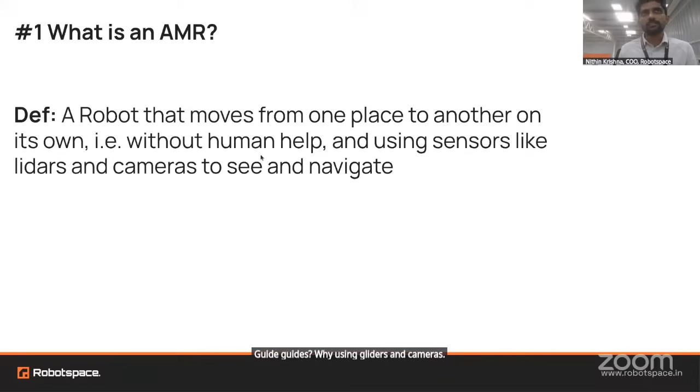So by definition, it is an autonomous mobile robot, which means that it's a robot that goes from one location to another, and it does not require any human help, meaning it does not require anyone to push it or guide it. It has its own guides by using lidars and cameras, and also it has its own motors so that it can move on its own, right?

Your voice is echoing. Sir? So can you hear me? Yeah, please go ahead. Mr. Nithin. Okay.

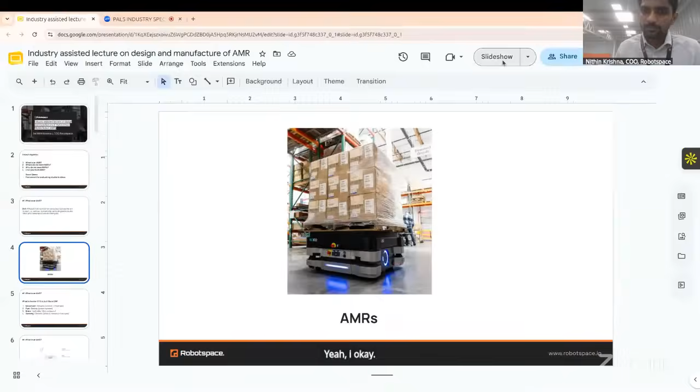Okay. So this is a typical AMR, right? And we'll understand what is inside it. It is just like another car. When I say car, we need movement, fuel, brain and sensing. When we say movement, it's basically the wheels. Wheels have motors and drivetrain. How do we make them move? We make it move using motors and wheels, right?

Then fuel, most of the time it is battery, because that's the easiest way to handle robots, right? And then there is brain, which is the controller. It's basically a computer that is sitting on it and taking all the decisions. And for sensing, what do we have to sense? We need to see the obstacles. We need to see the path. Those are all covered under sensors, which are basically lidars and cameras. Right?

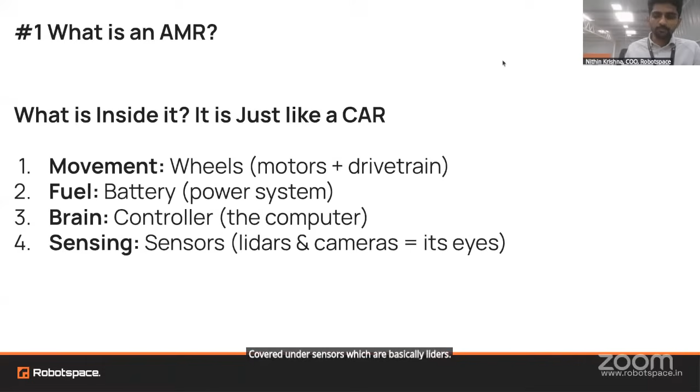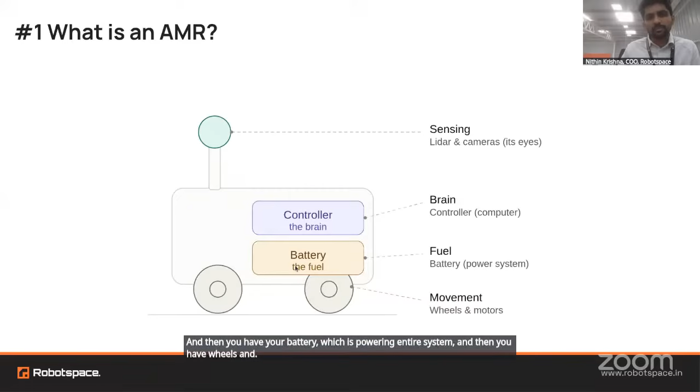So a simple block diagram of how it looks, right? We have sensors sitting on the top and various sides of the robot to detect any obstacle and also find the path, right? Then comes your controller, which is the brain, the computer, and then you have your battery, which is powering the entire system, and then you have wheels and motors. So this is the typical AMR in a block diagram.

Okay, and now, where do we need them? We know that warehouses need them. We saw just a picture, right? We need them in factories to move material from one location to another, or hospitals for serving medicine or food. And then airports, you might have seen robot vacuum cleaners that are cleaning inside the airports.

And for hotels also, in China, you might have seen some videos. If you ask for a water bottle, the robot brings it to your room instead of a person. So that is hotels and restaurants. We have already seen robo cafes which are serving food in India and also abroad, right? So there are multiple places where AMRs are used.

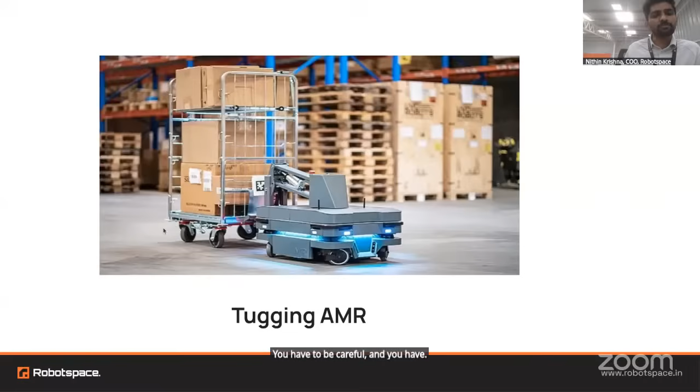It's just like we are driving a car and we have a trailer behind it. How do you turn it? You can't just turn like you do not have a trailer, right? So you have to be careful, you have to give additional safety systems, and also the radius has to be increased.

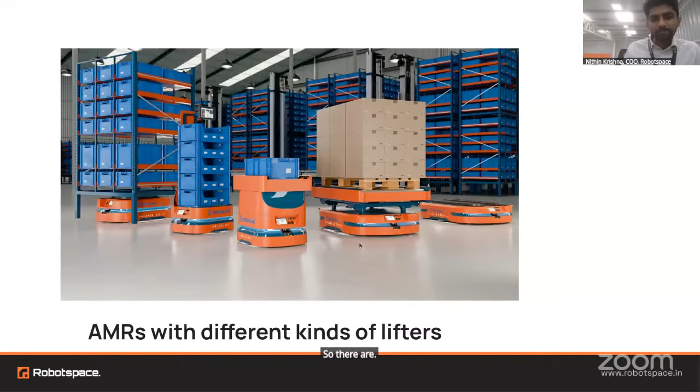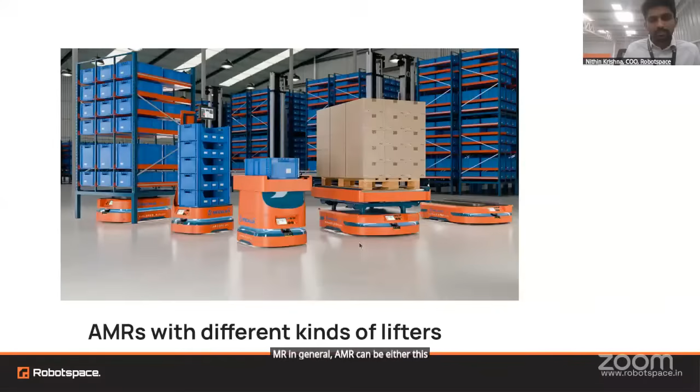I just wanted to show you all of these so that when I'm talking about AMR in general, an AMR can be a tugging one, or it can be a material delivery one, something like this. This is a forklift AMR. You might have seen forklifts, but this has the capability of an autonomous mobile robot, right? Meaning there is a lidar on top of it that ensures it goes without crashing into anything.

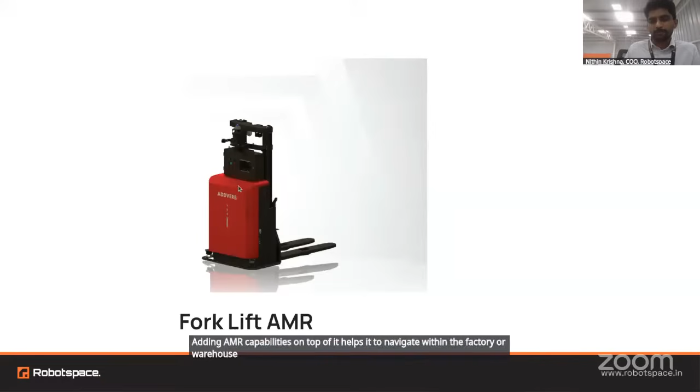And why do we need a forklift actually? Because usually pallets look like this one. To pick this up, the easiest way is a forklift. A forklift has the capability to pick any pallet, and adding AMR capabilities on top of it helps it navigate within the factory or warehouse easily.

So this is a delivery robot, right? This is also an AMR. It is an outdoor AMR, right? It is outdoor delivery. It delivers food. There are multiple use cases for outdoor AMRs. This is one of the robots that we have built actually.

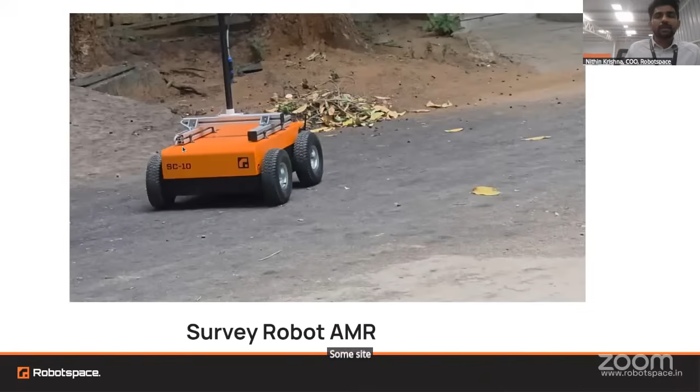This is doing a survey. So this is also an outdoor AMR. It is doing a survey of some site, and then capturing all the data, and it will give a report.

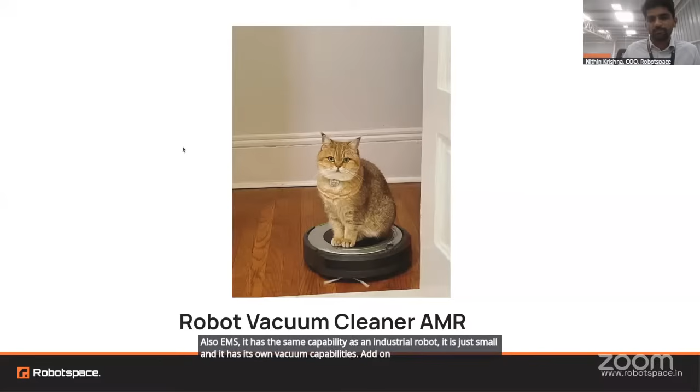So this is another robot, and you might have seen this kind of robot already in your houses, right? So robot vacuum cleaners, which are also AMRs. It has the same capability as an industrial robot. It is just small, and it has its own vacuum capabilities added on top of it, right? So this is a typical household AMR.

And these are the service robots that I was mentioning in the restaurants. So people in the kitchen load the material and click a button, and it will go to the table and stop. So all these AMRs fundamentally have autonomous navigation, meaning it can go from one location to another on its own. It does not require any human intervention to go from one location to another, right?

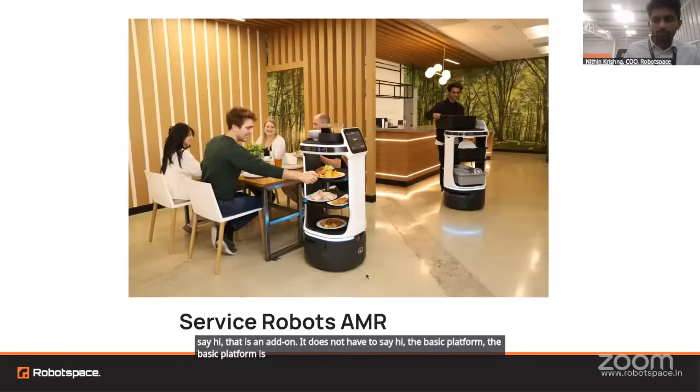All other things like picking the material is an add-on. Picking the material, placing the material is an add-on. If this robot has to say hi, that is an add-on. It does not have to say hi. The basic platform is the same for all of them, only the application changes. And this is medicines and all. Hospitals also use this kind of robot, right?

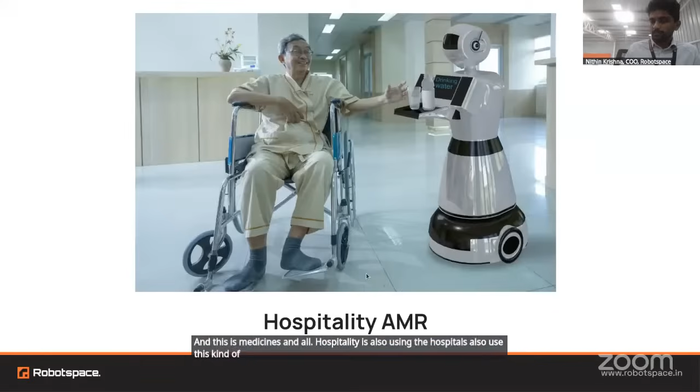And a little technical on this one here. So Scoot is made by Robotspace, and like any other robot, this also has the same AMR capabilities, but what we have built is a platform. So we did not specify you should only use it for manufacturing, you should only use it for warehouses. This can be used anywhere depending on the requirement.

So when we make this one robust, any application on top of it is just an add-on for the user. So it can be a restaurant use case, it can be a pharma use case, it can be a manufacturing use case. So these are all things that you can build on top of the platform, right? I'll quickly show what Scoot does. A live demo will help us understand

how the product is. I think we have Bharadwaj joining the call. I will stop sharing so that his video can be visible and we can pin it. Yeah.

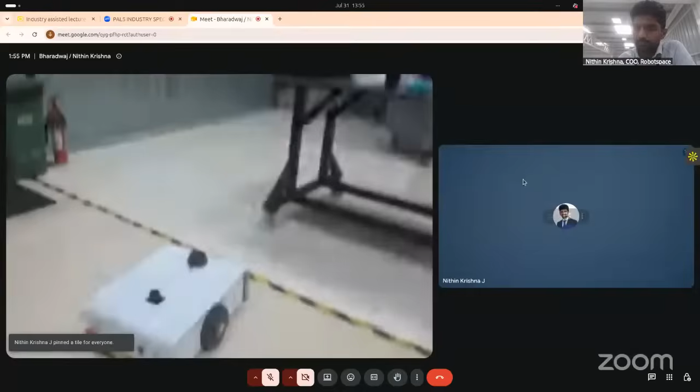Yeah, Bharadwaj. Okay, 1 second. I think. Yeah, I hope you can see the screens. Yes.

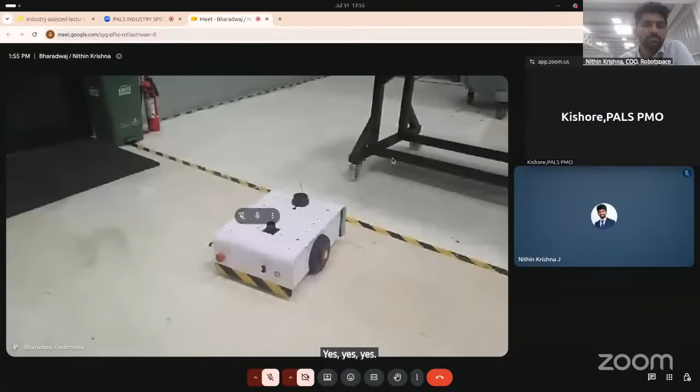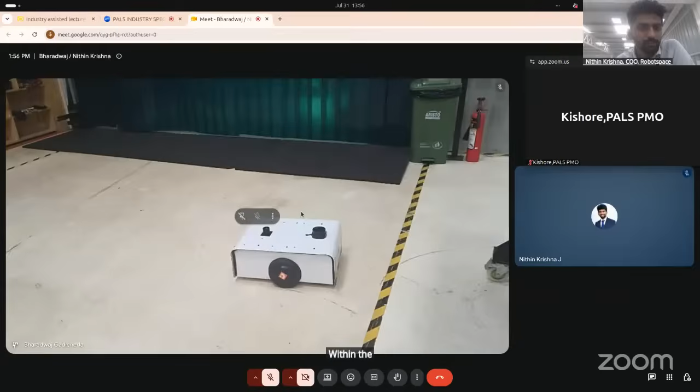So this is Scoot platform. So Bharadwaj, can you walk us close to the LiDAR? So the black one is the LiDAR on top of it, right? So this is the LiDAR, and there are motors, 2 motors, within the wheels itself; they are called hub motors. And then there are caster wheels that are inside. They are like dummy wheels which have the ability to rotate. Okay.

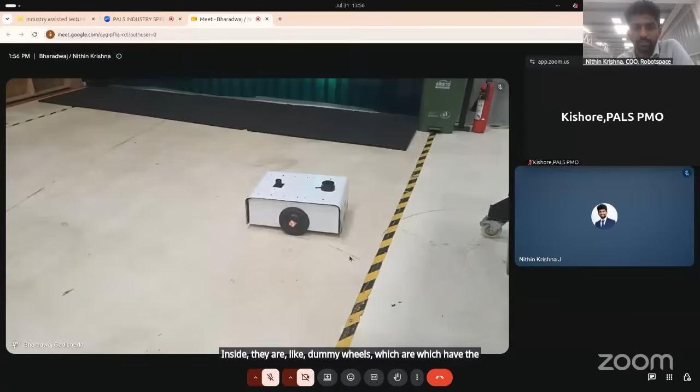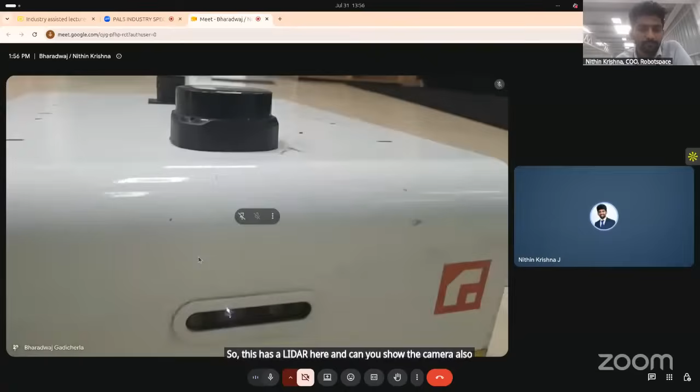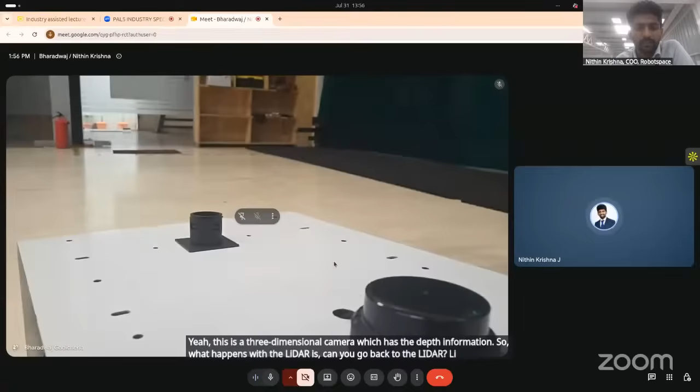Yeah. Bharadwaj, can you walk us close to the LiDAR? Yeah. So this has a LiDAR here. And can you show the camera also? Yeah, this is a 3-dimensional camera which has the depth information. So what happens with the LiDAR is, can you go back to the LiDAR? LiDAR has only a 2D plane. So it can only cut through the 2D profile, and it can detect different profiles only at that height. But if there is a person or some material that is above it, it cannot detect it. So for that reason, we use a 3D camera.

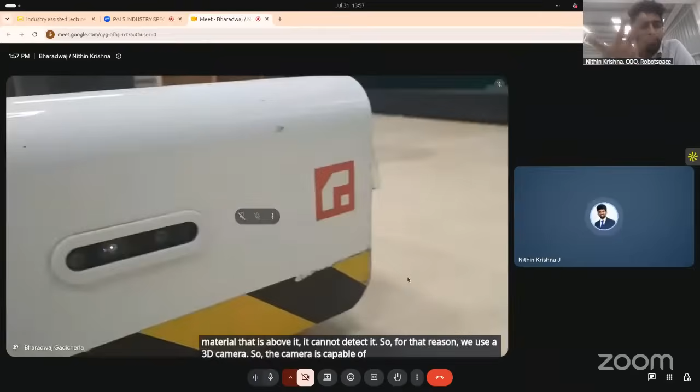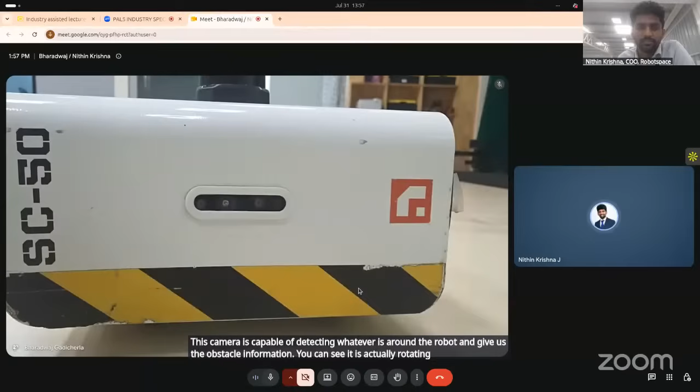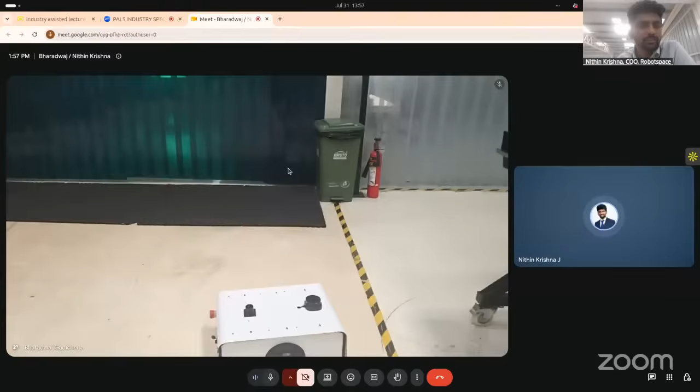So this camera is capable of detecting whatever is around the robot and give us the obstacle information. You can see it is actually rotating. There is a rotation that is happening in the camera, right? So let us have a quick demo. Can you ask it to move from one location to another, Bharadwaj? And do you have someone who can obstruct it? Yes. Can you ask it to go to a different location? Maybe show it in iFactory OS.

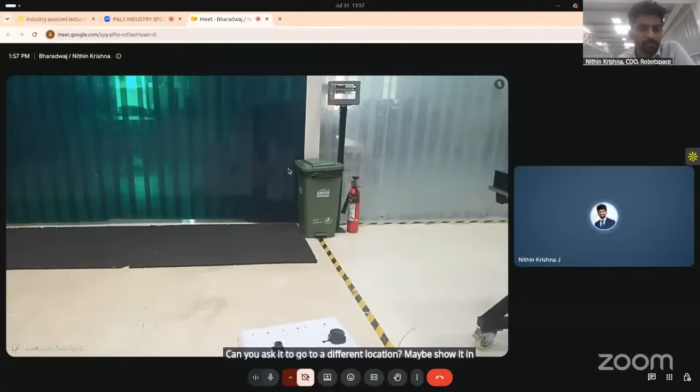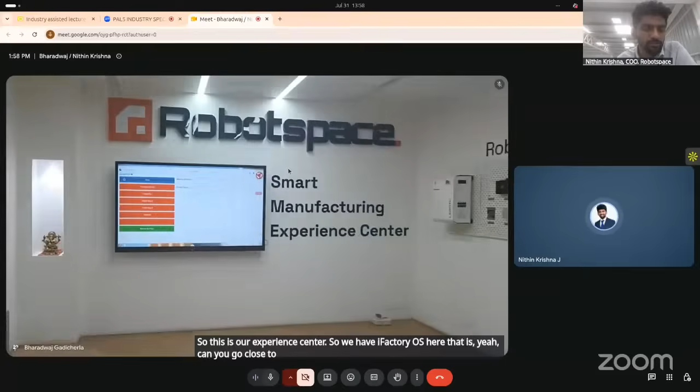So this is our experience center. So we have iFactory OS here. Can you go close to that and show the application? So this is the application that is controlling the Scoot. So it has different options. It can go to home, experience center, project bays. Currently it is at project bay 3, I believe. So you can ask it to go to the second project bay. It's okay. It's in project bay 1. It is going to project bay 2.

So when you click on this one, can you show us the robot? Yeah. So I think someone is trying to block the road. What it will do is it will find a different path, right? So it will find a different path and it will navigate around any obstacle as long as there is space for it to move. So it has come here and it has docked.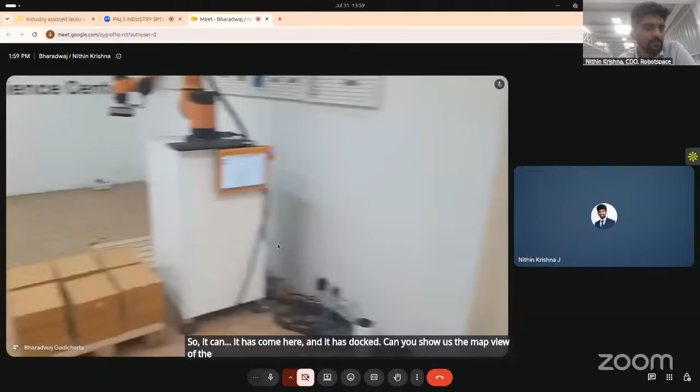Can you show us the map view of the robot? So what happens is when we map this entire area, you will get a map like this. This is effectively the plant layout that we have here. So you can see this blink is where it is currently. So if you click on a different area, it should be able to go there. So it's a flag and basically it's a goal. So it goes from that location to a different location. So we can control that from different interfaces.

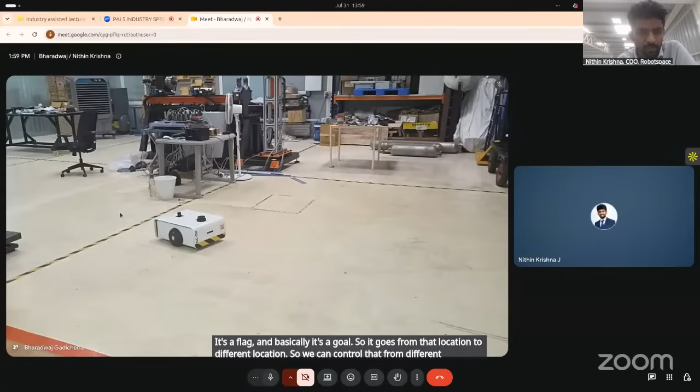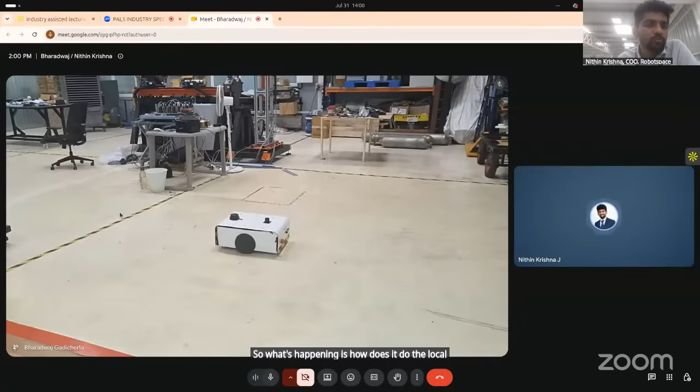So what I think everyone would be interested in is, how does it do the localization? How does it know where it is, right? So that's something that we are more interested in. Can you keep it here? Yeah. So what happens here is it projects a lidar in all directions, 360 degrees. Right? When it projects, initially it has a map. This is the map it already has. Now, when it is at this location, it projects lidar and it will basically check what is the distance from here to this area. So when lidar is rotating, it will have.

Bharat, I think your video is lost.

Yeah. So what happens is when lidar emits laser, it will compute the distance from this point to this point, this point to this point, in all 360 degrees. So when it does that, it has inbuilt algorithms to compare it with the walls. So it will know where the walls are, it will know where the corners are. So it will automatically align it to the map and understand that it is at this location. Otherwise it will not be able to know, because it is not GPS, right? It does not know where it is. So this is helping it to localize.

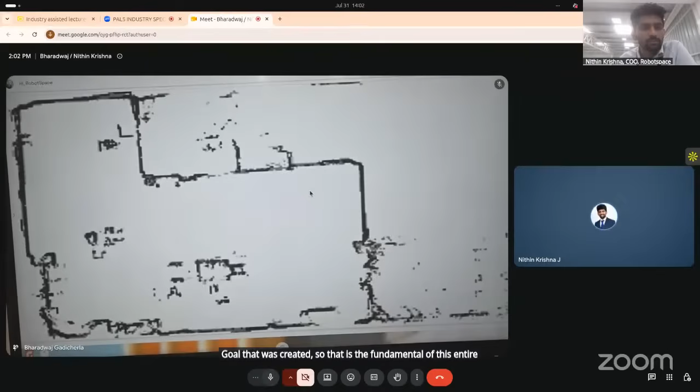So it has the ability to localize based on the walls, and it also has the ability to avoid obstacles in real time. So that is two. And it also has something called IMU, inertial measurement unit. Basically it will tell the robot where it is from the starting point. It will know exactly where it is moving, whether it is moving sideways or so.

LiDAR plus camera plus IMU plus odometry data. So like our cars have how many kilometers it has moved, same way the Scoot also will have an odometer, which will tell how many meters it has moved forward. So based on all this, sensor fusion will happen, and automatically it will be able to accurately position itself within any room, right? So that is the fundamentals of the AMR.

Bharat, I think you can turn off. Yeah, we'll go back to the presentation. So coming back to our presentation.

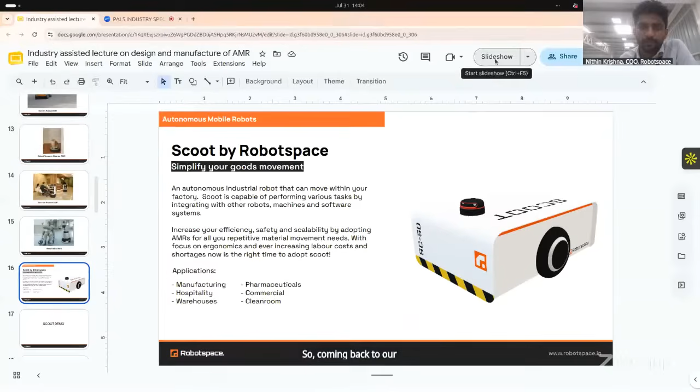Okay, so that's done. So now after we understand the architecture, how it works and all, why do we need AMRs? We all know that labor is short already, and speed and throughput can be improved with robots. And the safety aspect: some areas you don't want people to go, so you can have the robots. And there are a lot of industries that use manual labor to pull, so we can have these robots as an alternative. And then these are flexible. So this is very important actually, right?

There is something called automated guided vehicles. These are like trains. It will need a guide to move. It's not like a train, it is a tape. Like you might have already seen line follower robots, right? This is an industrial version of it. There can be a black color tape. There can be a magnetic strip having magnetic material in it. Based on that strip, it will keep following that path. But unfortunately these robots don't have a brain, they just keep going, right?

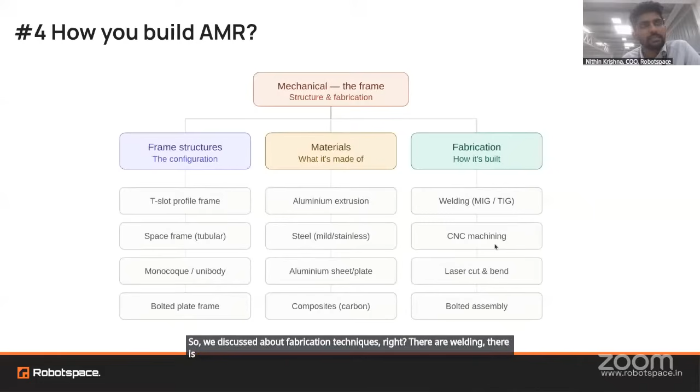Okay, before I jump into electrical. So we discussed fabrication techniques, right? There is welding, there is machining, laser cutting and bending, and bolts for all the aluminum extrusions. Bolts are used, T-nuts, and so the fabrication is done. Now the mechanical aspects are done.

Now electrical. Coming to electrical, you have your sensors, you have your power distribution, how the battery should distribute to different modules. Not everything will work at the same voltage, right? So that is one concern: the computer operates at 9 volts to 36 volts, for example. The motors operate at 24 volts. Some sensors operate at 5 volts. Some things only operate at 24 volts.

So how do we ensure that your battery, which is 24 volts, can do all these activities? We can't have separate batteries for separate systems. That would be very inefficient, and also difficult to charge them, right? So that is something we need to think about. And motor drivers, how do we drive the motors? So all this wiring. So I'll jump into the electrical again.

So again, splitting electrical into three different parts. There is power or the battery energy, then there is sensors, the sensing hardware, and the controllers, the motor drivers, and various other things. When you come to power or battery packs, we need to decide the voltages that are required and the capacity, how many amp hours we need, how many amperes.

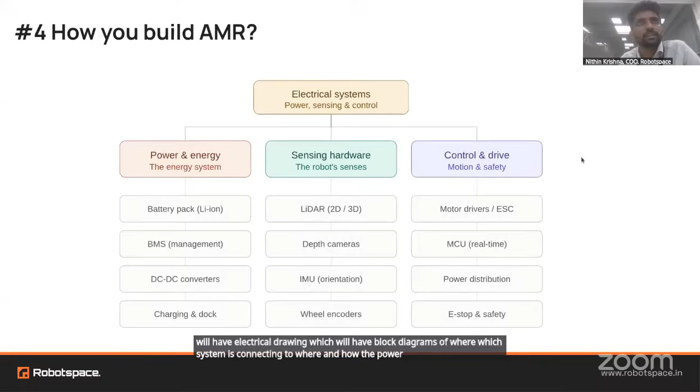So when we bring e-stop into the picture, how do we wire them? Which systems should shut down, which systems should still be alive? Those decisions have to happen at the electrical drawing stage, where you will have an electrical drawing with block diagrams of which system is connecting to where, how the power is distributed, and where the e-stops are. Those are all part of the electrical drawing.

So we'll go for something like Velodyne, which is a very big company that has large ranges. Then you need industrial computers. Unlike our laptops, you need a computer that can sustain this kind of computation, and also does not heat up, does not break. So we need industrial computers that have heat sinks and all. So these are all going inside the robot, right? I think this is done now.

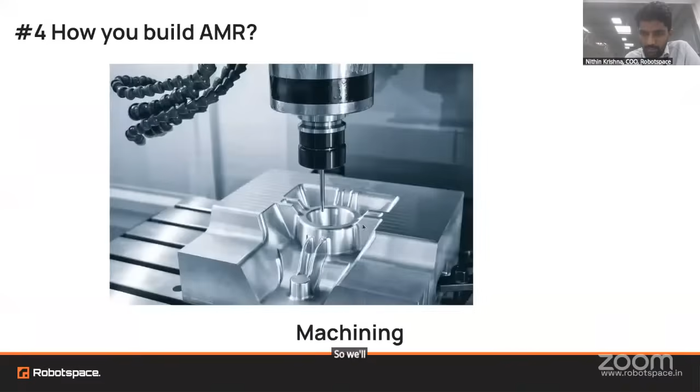Coming back to software. The third part is, these are all done, electrical wiring is done, mechanically the robot is ready. Now we need to write the actual software that will do the job, right? The job of going from one place to another, the job of planning the path, the job of taking decisions on the fly. So those are all part of the software. So I'll go back to the software.

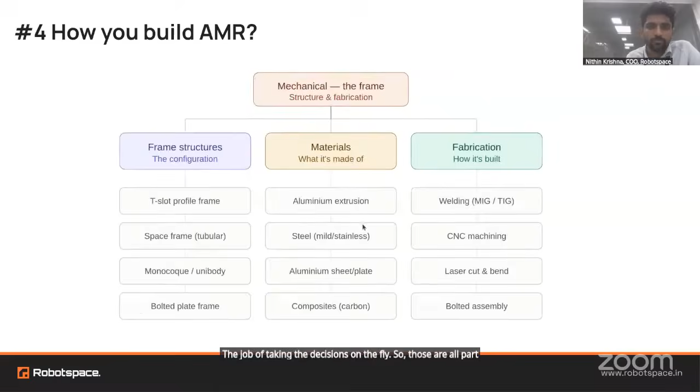In software there are again three divisions. So basically you have to use some framework. ROS2 is a very famous framework that is very standard nowadays. It's easy to learn also, because there is a lot of open source material that can be used. So using the ROS2 framework, once we understand how to set it up, we can write drivers. These drivers are required to communicate with your motors.

What ROS actually does is, it can take inputs from your lidar directly. So when you say at 0 degrees my lidar sees an obstacle at 1 meter, at 1 degree it sees something at 2 meters, this information from the lidar is sent to ROS2. When we configure it, it will understand that the robot is at a certain location, and it is seeing obstacles in all 360 degrees, right?

So that is an input for it, and your encoders are an input for it. When the wheel moves, that is an input for the robot. So it will understand, okay, if the right tire moved forward and the left tire moved backward, what happens?

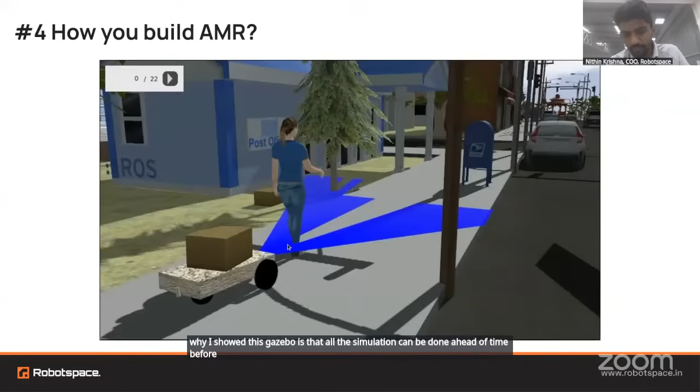Right? So there are very good resources available for learning, and I wanted to list those also. I think we have spent a lot of time on slides. We will also have a Q&A session, I guess. I just wanted to share learning resources for ROS2 and Nav2. There is a very good online tutorial. And for mechanical design, I'm sure you might already be using Fusion 360 or SolidWorks if available. So that is one item.